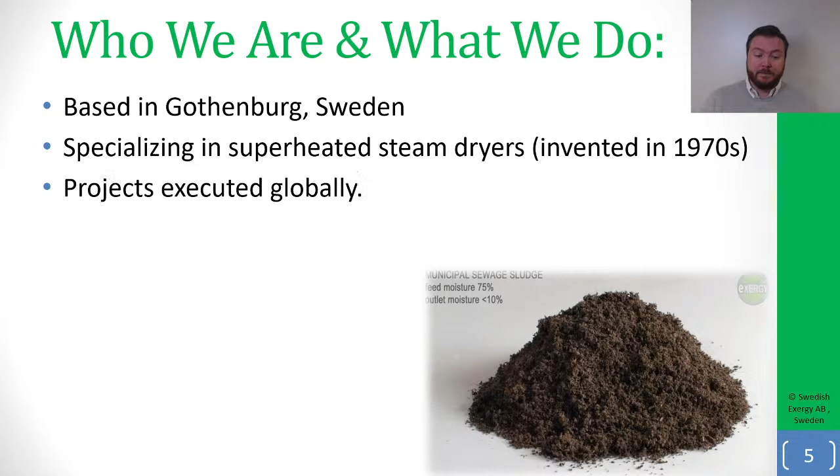First off, who are we and what do we do? We are an engineering company based in Gothenburg in Sweden, Gothenburg being the second largest town in Sweden. We specialize in dryers, especially superheated steam dryers, which we invented in the early 70s, and that's also when our company was founded. We have executed projects worldwide, globally.

We have been working on solutions for wastewater sludge since the early 90s. We started in the early 90s by conducting testing and studies with our local wastewater treatment plant here in Gothenburg. So we have a good long experience with dealing and handling sludge. We also have a pilot plant where clients can conduct pilot testing with their projects. Like mentioned, we're focusing and specializing in dryers, but we also have our own evaporators that we design and build.

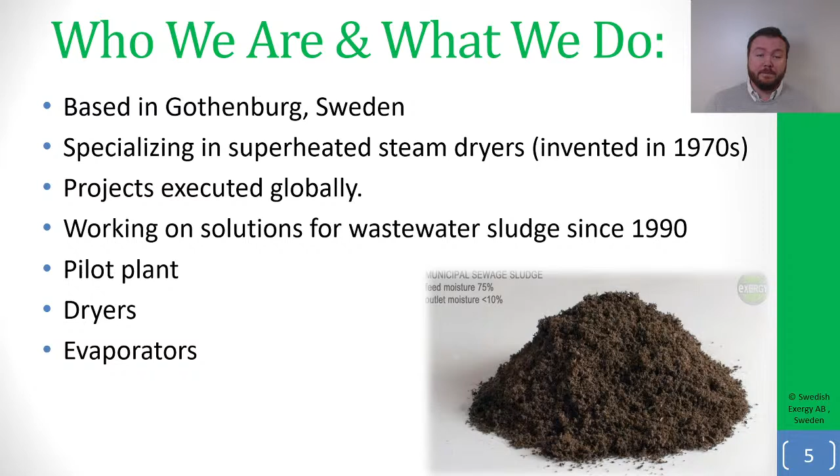So moving on to what's the definition of sludge. Well, our definition is that sludge is any solids, semi-solids, or liquid residue from the wastewater treatment process. So it's basically everything that gets flushed down into the drain. This is also what makes it so hard to define what sludge contains. But some of the things that we know sludge contains are heavy metals like cadmium, copper, lead, and other various types of heavy metals. Prescription drugs: it's common to find traces of antibiotics and other types of prescription drugs in the sludge. And of course, also other types of human waste. Like I said, everything that gets flushed into the drain eventually turns into sludge after the treatment process.

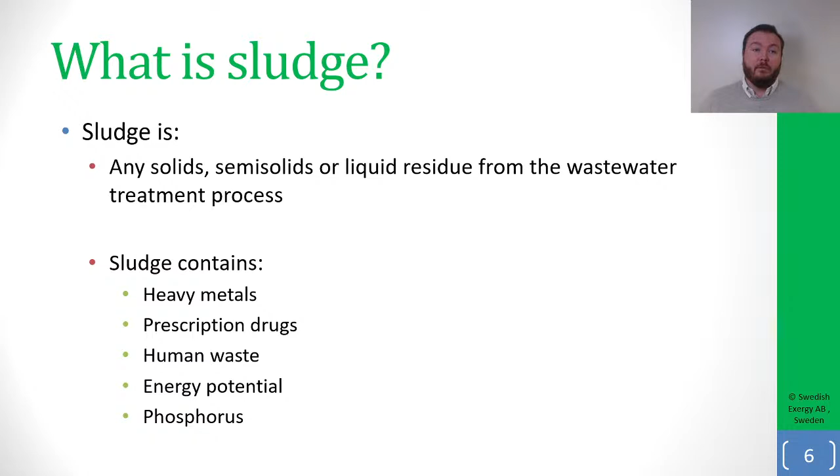But sludge isn't all bad. It contains a lot of good things as well. For example, sludge has a very good energy potential. It also has very high levels of phosphorus. As the population of the Earth is ever increasing, the demand for food is also increasing, which also leads to the demand for phosphorus increasing. For example, here in Europe, when we saw a phosphorus crisis a couple of years ago, we could actually see that food prices were going up.

So what are the current issues that both we're seeing and the companies and the municipalities that we're talking to are seeing? One of the main things is it's incredibly expensive to dispose of sludge. This is due to the high water content of the sludge itself. A lot of municipalities and wastewater treatment plants contract other people to come and pick up their sludge at a cost to then be disposed of, either incinerated or spread onto farmlands, for example.

But to get a perspective, in the European Union alone, we produce about 10 million dry solids tons of sludge per year. So that's 10 million tons of dry sludge per year. But considering that the sludge has a water content of upwards of about 95%, you can really realize how much sludge we're actually producing every year.

If we look at Germany, for example, which is the biggest producer of sludge in Europe, they produce a little bit over 2 million dry tons of sludge per year. And when talking to both municipalities and companies in Germany, they're seeing that the cost for disposing of the sludge is ever increasing. Right now, they have to pay about 100 to 120 euros per ton of sludge they dispose of, but they believe these figures will rise to about 160 euros per ton of disposed sludge.

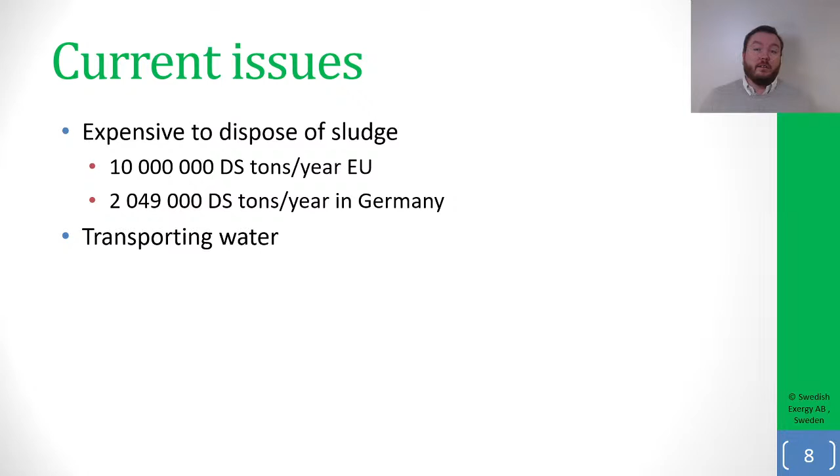Like I mentioned, one of the current issues is that we're actually mostly transporting water. Even if the treatment plant has a mechanical dewatering system, which maybe gets the dry solids content to about 30%, roughly 70% of what you're transporting or disposing is still water.

Another issue, like I mentioned, is the uncertainties of what the sludge contains. It contains a lot of heavy metals, prescription drugs, and lots of other unknown substances that are hard to recycle and hard to dispose of properly.

Then it's also hard for both municipalities and companies to find cost-effective and at the same time environmentally friendly ways to dispose of the sludge. It's normal that you either have a cheaper solution that's maybe not that environmentally friendly, or you have a more expensive solution that is environmentally friendly.

We're also seeing stricter rules and regulations, especially here in the EU and especially here in Sweden. In Sweden, in fact, we have some new proposed stricter rules and regulations that will effectively ban the spread of raw sludge to farmlands. And this is something that will create huge headaches for municipalities and companies alike.

And we do believe that this is the way forward for the whole world, that globally these rules and regulations will be stricter in the years to come. So we believe that companies and municipalities have to act now before it's too late.

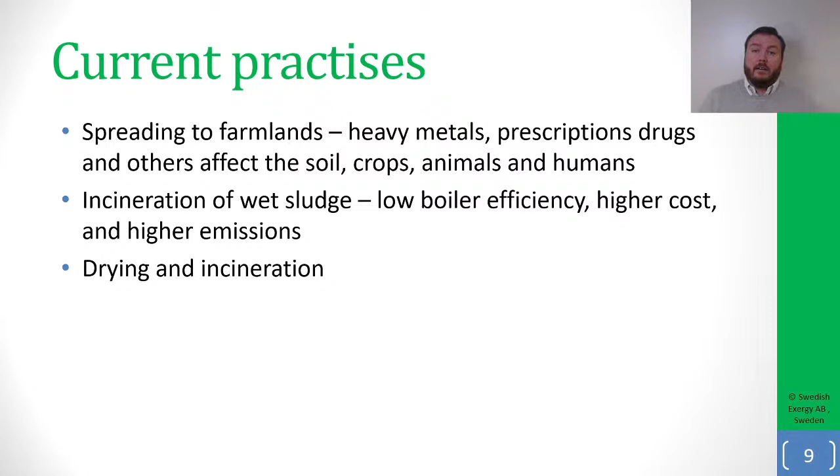Then we're seeing proper drying and incineration, which is something we believe is the way forward, and we're very happy to see this. But the types of dryers being used right now are very polluting. They're very energy intensive and maybe not the best suited types of dryer, especially for sludge.

The last practice that we see, maybe not so much in the European Union, but in other parts of the world, is just pushing the problem forward and disposing of it in landfills.

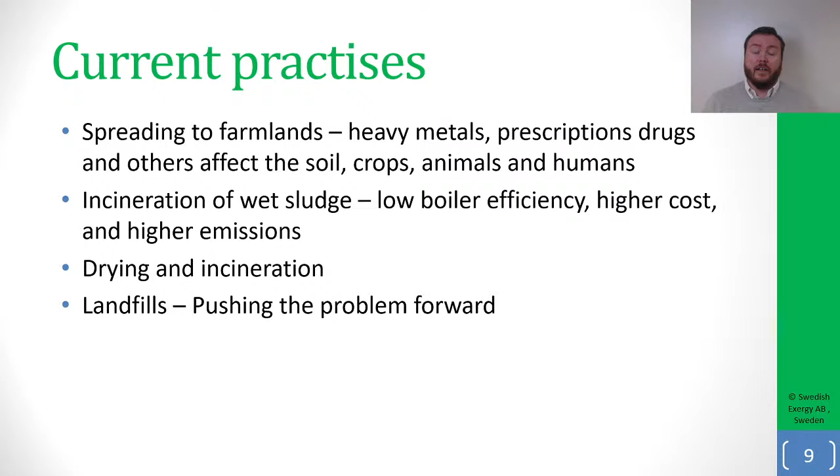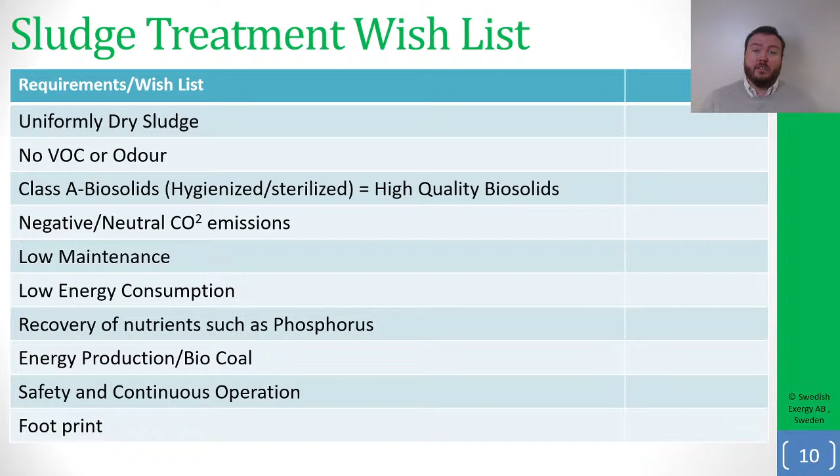Throughout the years, when talking to both municipalities and companies, we have been gathering their wishes on how they would like sludge treatment to work. We've been piling these up into this slide that you're seeing in front of you, which we call the sludge treatment wish list, which Manish is now going to go through, and also talk about our proposed solution for sludge handling.

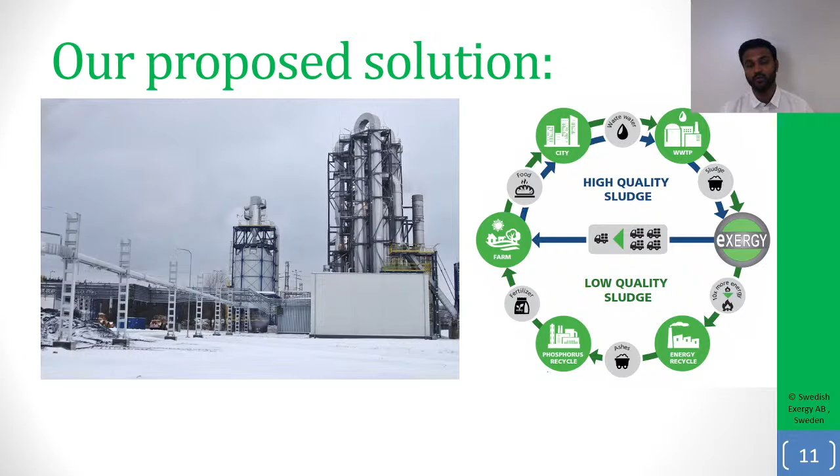Thank you, Christopher. So, I'm going to go through a couple of propositions that we have and how we solve sludge. The first one, as Christopher mentioned, is combustion. This can be done in monocombustion, or in existing combustion units that we have in different cities.

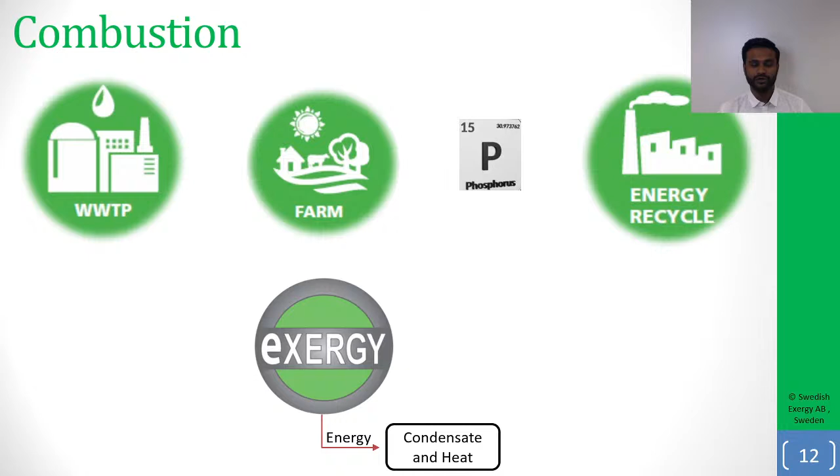The way of doing it is we take the wet sludge at about 25% dry solids, achieved by a decanter or centrifuge, for example. That sludge goes into the super steam dryer and gets dried to 90% dry solids in under 15 seconds. That sludge then goes into a combustion unit where we recover the phosphorus from the ash after combustion, and we produce energy from the combustion. This phosphorus can then be used on farmlands, and we achieve a circular economy.

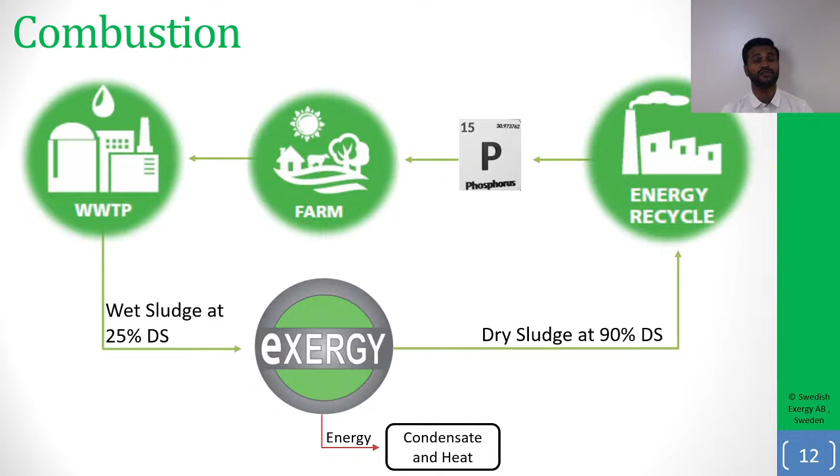Now, this energy that we're getting back from the dryer in form of condensate and heat, this energy can be used in other processes, such as digesters, increasing the production of biogas, as an example. So this is an energy that is recovered from the dryer and at the plant's disposal.

Now, the second one we look at is if we take this sludge and we dry it and create biocoal through pyrolysis. Same solution as before. We take the wet sludge at 25% dry solids into the super steam dryer and we get our 90% dry solids. Now, these figures, 25 and 90%, can be adjusted depending on what we have available. The 25% can be 20%, it can be 30%, it can be 15% into the dryer. And same when it comes out of the dryer. It can be 85%, it can be 90%, it can be 95% if required.

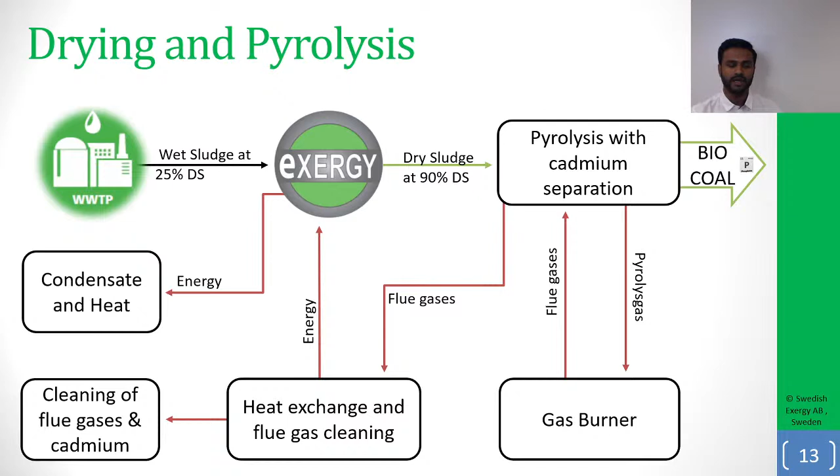Now, this dry sludge then goes into a pyrolysis where we get biocoal with phosphorus still in the biocoal. From this pyrolysis, we get the pyrolysis gases into a gas burner. We get the flue gases that drive the pyrolysis, and from the pyrolysis, we get the flue gas into a heat exchanger, which gives the energy to the dryer. And again, from the super steam dryer, you're still getting that energy return for other processes. And we clean the flue gases and cadmium.

Now, why the super steam dryer? Why are we proposing the steam dryer as compared to any other technology that we have in our arsenal or any other technology that's out there? Well, if we go back to this wish list that we had, we want to achieve a uniformly dry sludge because we want the boiler efficiency as efficient as possible, as we don't want any fluctuations. And with the super steam dryer, every single fiber that is in the dryer gets exposed to the same conditions. So every fiber gets dried to the same level. We don't get this variation of the top layer being more dry than the bottom layer, and all those issues that we see perhaps with other technologies.

We don't want any VOCs or odor. Now, since the super steam dryer is a closed loop system, we don't have any air emission from the dryer. And since it's a closed loop system, we don't have any odor either. And we also want to achieve Class A biosolids. That's one of the requirements.

Well, since the temperature in the dryer is high enough, and we are drying under 15 seconds, but exposing it to higher temperature, we do get a completely sterilized product when it comes out of the dryer. And this is something that we have done tests on, as Christopher mentioned, here in Gothenburg, from the sludge, and independent labs have done the test, and we achieve Class A biosolids to the level that we actually go above and beyond what is required for Class A biosolids.

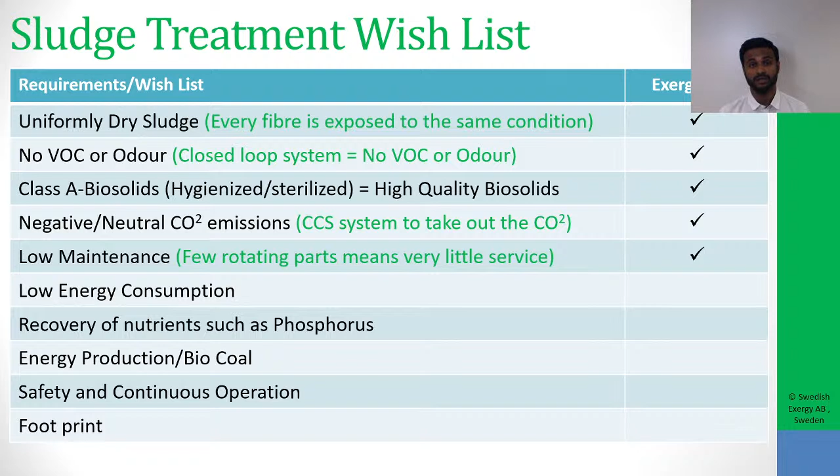And wastewater treatment plants, their main focus is not handling the sludge. As you know, it's wastewater treatment. So sludge is an afterthought. It's not their core business. So they don't want to spend a lot of time on maintenance. So you want a solution that doesn't require so much maintenance. And since the super steam dryer has very few rotating parts, that means very little service is required of the dryer. And as I mentioned a couple of times, the energy consumption is very low because the net energy is roughly 150 kilowatt hours per every ton of water that's evaporated from the dryer.

And up to 95% of the energy is recovered from the dryer. So you put in 100%, up to 95% of the energy is returned from the dryer. And this energy can be used in district cooling, heating, or other processes. You can use it as a pre-dryer as well. As an example, you can use an MVR to make the dryer completely self-sufficient in energy, because then we will take the energy from the dryer through the MVR and feed it back into the dryer again.

And the recovery of nutrients such as phosphorus is very important, as Christopher mentioned. And we do that via the ash or the biocoal process, or we can also recover the nutrients from the reject water as well, before it even gets to the stage where it needs drying.

And if we have a dry product, then we can have energy production, and we can produce biocoal, which is soil improvement. And sludge all of a sudden is not a waste, it becomes a resource. And our clients also want a safe and continuous operation, since most of the wastewater treatment plants are located within the city vicinities. And within the city or close to city environment, you want a safe and continuous operation. You don't want any stoppages.

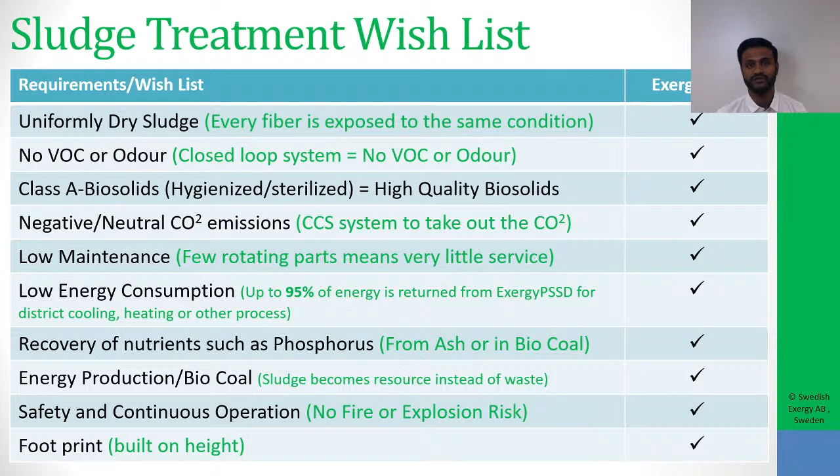Yeah, so I just want to talk a little bit about a recent project that we are currently executing in Turkey for one of the bigger energy producers located in Turkey. They have seen, like many others, the increase in sludge, but they're also seeing the energy potential that's hidden in the sludge. They are today an energy company that incinerates biomass to create both electricity and heat. But what they're now going to do is, with the help of one of our superheated steam dryers, they're going to start accepting sludge from local industries and also municipalities at a cost.

They will then take this sludge and dry it in one of our superheated steam dryers from about 80% moisture content down to 25% moisture content. The capacity of this dryer will be 330 tons of sludge per day, but since they do believe that the demand will increase, this dryer can later on be upgraded to 500 tons per day.

What they're really doing is that as of right now, they're incinerating biomass to create electricity and heat, like I mentioned. But now they're also going to mix in co-firing the sludge, which they're getting revenue for. So instead of them having to pay extra for more biomass to produce more heat and electricity, they are actually getting paid by municipalities and companies to take their sludge. So that's basically free fuel that they get paid for, that they're able to dry and then incinerate together with the biomass to produce electricity and heat for the local area.